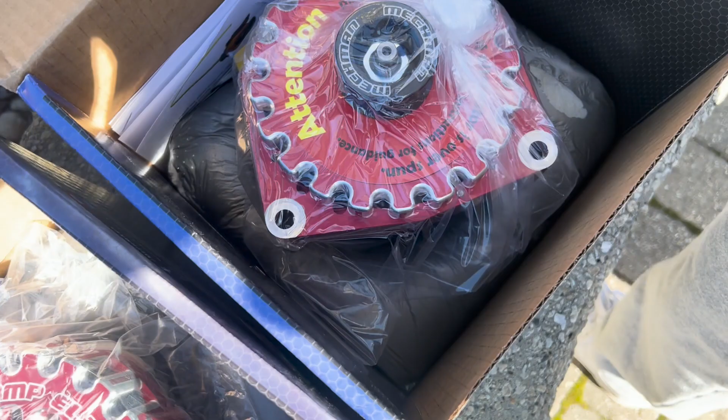All right, we have the P103 2-pin adapter there. I'm going to talk a little bit about that here shortly. Let's open this baby up. All right, so here we go. So I am going to be running two 400 amp alternators. Let me go ahead and open this up for you, make it look real nice. Oh, these things are nice and got some nice weight to them.

Mechman Elite Series alternators is the best alternator choice for any power needs that you have. This is going to be 400 amps, and I picked it in red. It comes built in here with the battery negative adapter. It comes here with the positive as well, and right here it comes built in with the 12-volt ignition switch. So this is your factory 12 volt that you would plug in. I am going to be changing this, and I'm going to explain why shortly. So let me set it down here.

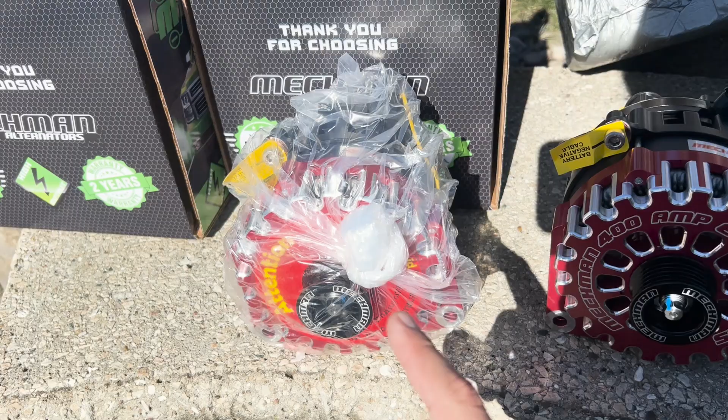And now let's talk a little bit here about this adapter. So let's go ahead and open this up. So the 101, from talking with Tony, again, great guy. You connect this yellow straight to the 12 volt. I am using the 05 Tahoe, and I believe this is the same for 05 to 13. To sum it up, it already comes connected, plug this into a 12 volt ignition, and then you're going to put it underneath the fuse box to a 12 volt ignition source.

With the dual alternator, you would connect the two somewhere and then run one connection to the middle. With the factory 2-pin that comes with the 05s, you would use that and connect it into this, and then this would go into a dead end, so this wouldn't go anywhere. You would just plug it in, and then this would just go simply straight to the 12 volt. So makes it nice and simple.

But because we are going to be running lithium, and this is something that Tony talked about, and that I am very happy that he explained, this is charging at 14.5. Lithium and the Yinlong cells that I talked about in the previous videos need to be at about 15.5. You don't want to charge them at 100. You want to be right below. And if this is at 14.5, the Yinlong is going to be very severely underpowered, and it's going to be bad for them. So you need to increase this charging voltage about 1 volt.

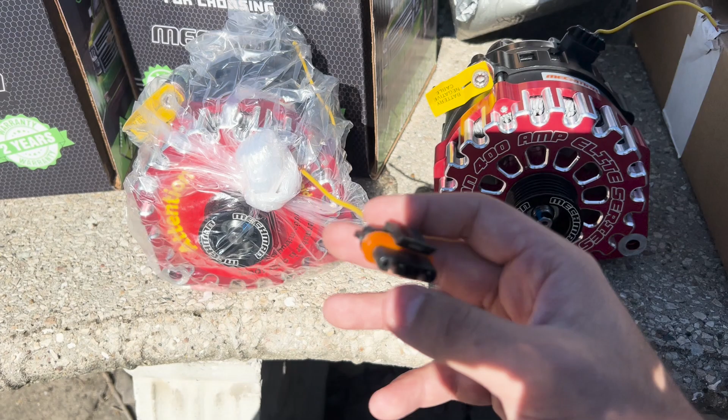Thankfully, Mechman, Tony, has a perfect product for that, which is this 2-pin adapter that you would connect onto the alternator. So pretend that this is no longer there. Now this is plugged in.

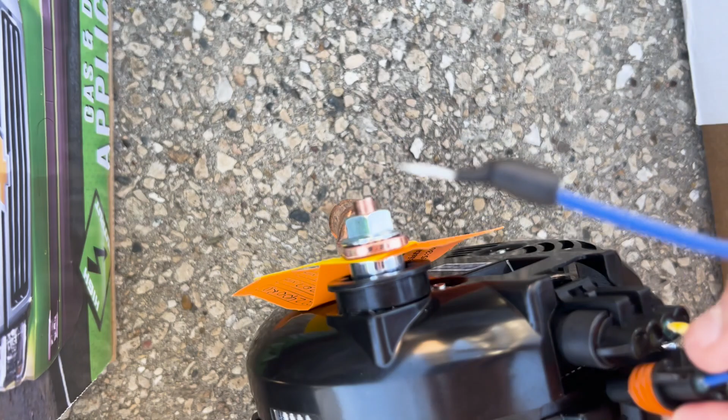You would plug this in here. Same story, this would go to your 12 volt switch, but this is what creates the 1 volt increase. So you would plug this blue wire into the positive over here, the battery positive cable, and that would cause the voltage to increase from 14.4, around 14.5, to 15.5, 15.6 around there, which is a lot more optimal charging for the Yinlong.

So I have two of these that are gonna go one in each alternator, obviously, because I want them both to be charging. And like I mentioned, I'm gonna have a front battery delete, so I am not gonna be charging 12 volt anywhere. Once these are wired up with this handy dandy dual setup here, we are gonna be running two of them very efficiently.

So let's go ahead and open this up. Mr. Alternator, set this down right here. All right, so this is the belt that comes with the dual setup, so we're gonna set this aside for now, and then this is what it's gonna look like when it's all installed.

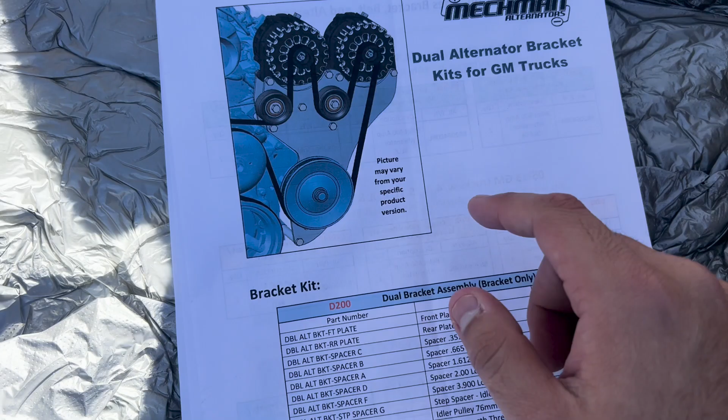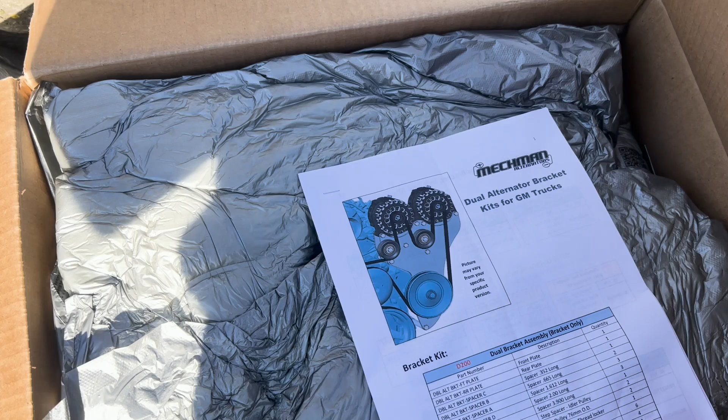Mechman includes the instructions for this so that you're able to step-by-step follow along. So if I got people that are barely learning about this, I'm gonna go ahead and flip through this specifically page by page so you can kind of look at what the instructions would look like. Again, I'm running the 05, so this is the model that I'll be running.

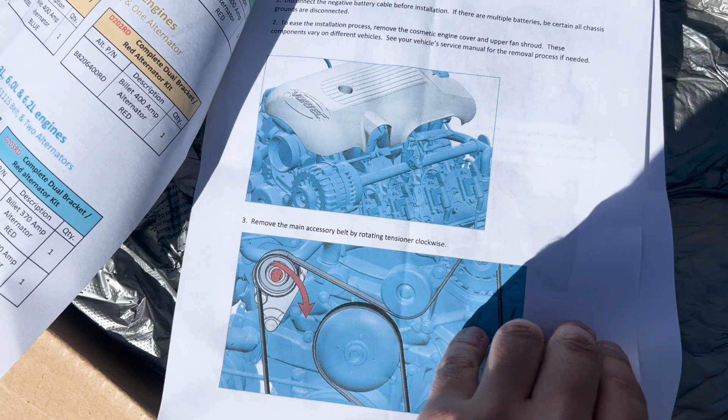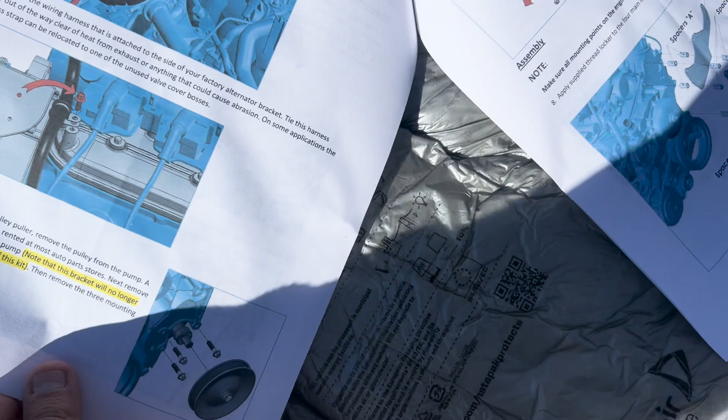I will have an install video coming on this very shortly. I'm gonna be installing this actually with my mechanic. This is my first time installing this sort of system, so I'm not going to try to install it myself. I'm gonna outsource it to my mechanic, who is very, very familiar with GM trucks. We'll have a video with him and I both installing them coming soon.

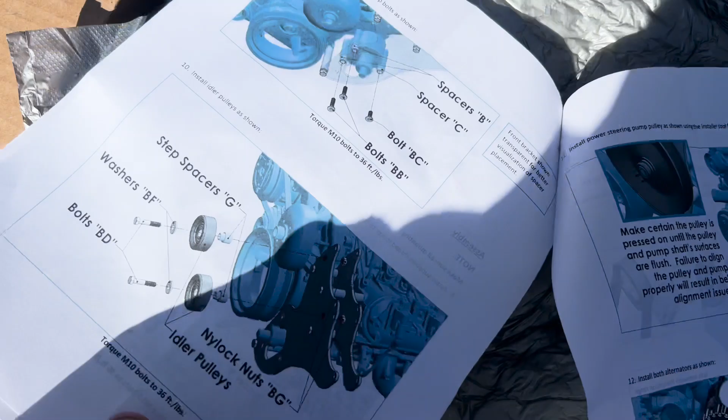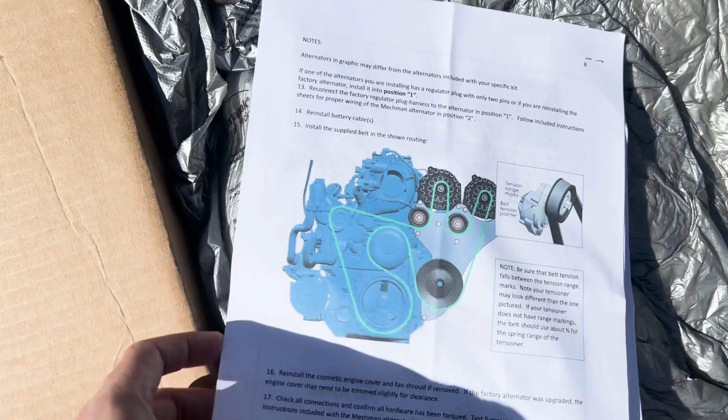And this is all also available on the website. So if you wanted to look at this yourself before you buy, this is all available on the website. So again, makes it very easy. This is what the diagram will end up looking like once you have the dual alternator set up.

Go ahead and set this down here. Here are all the parts. I'm ripping this, so I'm actually not gonna put too much effort into getting in there, but the part that was outlined in the instructions is what you'll have. Pretty simple, you have all the parts that you need here.

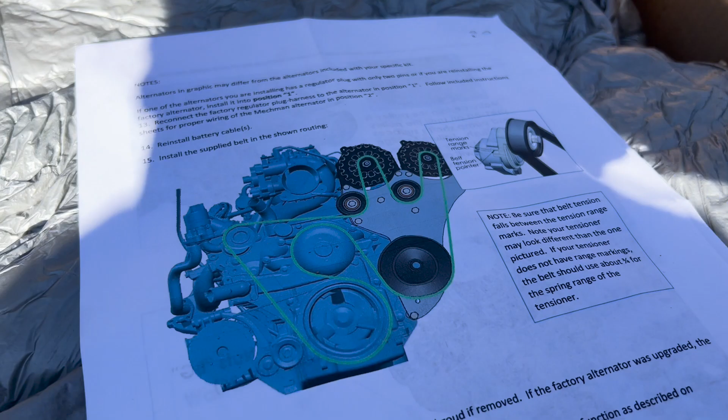So that is the dual setup for the Mechman. So that is about it. Again, this is what will be inside the box. Sorry, I wasn't really willing to open it up right now, I don't want to take everything apart. And then this is the belt and the dual Mechman.

So again, thank you for tuning in. We'll have more videos coming shortly. Tahoe should be back relatively soon now. It's getting warmer, I'm aiming to have it done by around spring, April, Marchish even. So it's gonna be happening pretty soon. And when it's happening, it's gonna be bumping.

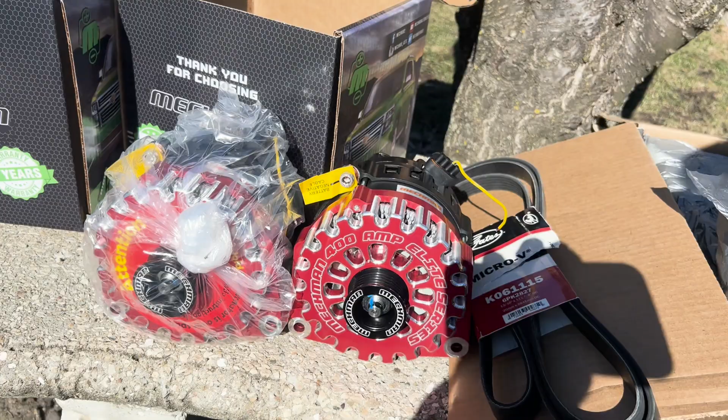These dual alternators, man, they're the best in the game. And if you power these with the Yinlong banks that I'll be running, we are gonna be very loud. We're gonna be slamming.